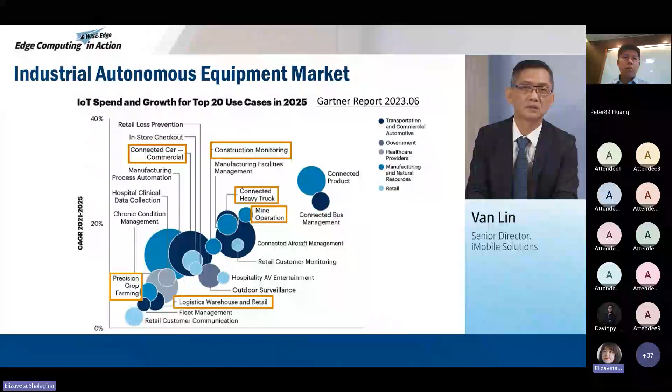Right now, what kind of vehicles should Advantech focus on? Definitely not consumer vehicles. We don't work with the kind of cars you drive daily, but we mainly work on enterprise, industrial, intelligent, autonomous machines and devices. This includes port, mining, construction, agriculture, warehouse - all of this stuff needs more intelligent machines to help with better productivity, efficiency, and safety.

So you mentioned you especially focus on heavy-duty machinery. Yep. And we have many harsh conditions that really need these machines, and among those, mining is one of the most demanding and harsh conditions in these sectors. So explain, in the mining condition, what are the key challenges you're facing, and do you have any solutions? Okay, so the first thing is Advantech has worked in the mining industry for more than 20 years, and based on all that real practice, even until now, we recognize one thing.

Sorry, the world still has a war going on, and right now natural resources are the most important thing for any country, whether emerging or a very mature region. Natural resources definitely are power, so many countries invest a very big amount in the mining industry. That includes intelligent mine site setup, and also includes intelligent mining machinery.

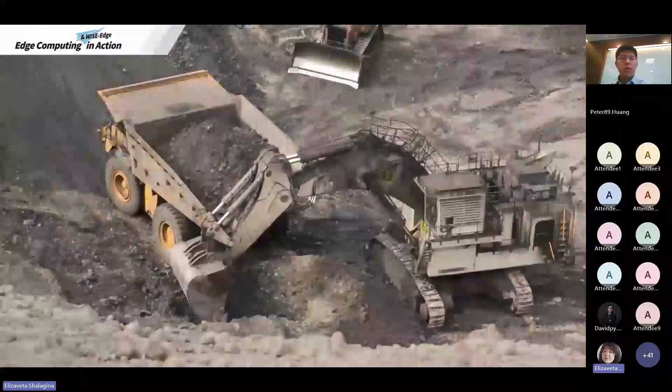That means in the deep mountains, if the equipment has any issues, any problems, or any safety risk, then the mining site must be shut down.

Not only does the port have strike issues, even the mining site has the same topic. If we want the mining side to have productivity and efficiency, we try not to rely so much on experienced people. We need to use more technology to let the machine and the mining side work more efficiently. Advantech has decades of solid experience in this domain, so we can deliver intelligent mine-site solutions to build up the intelligent mine-site environment.

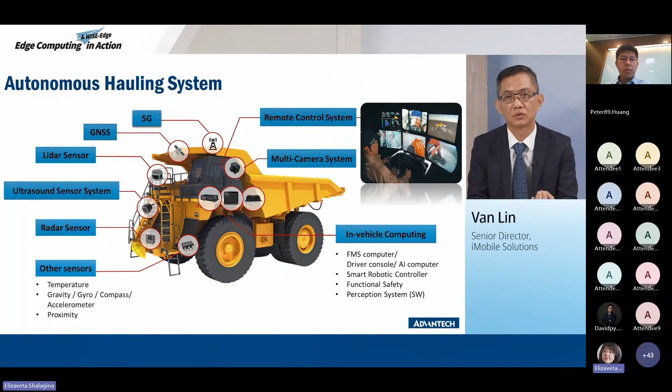No matter about connectivity based on Wi-Fi, private 5G, or V2X technology for communication - we also have an intelligent mining machine device equipped with our solid, trusted in-vehicle computer solutions, combined with our ecosystem, like LiDAR, radar, and all the AMR software partner platforms. We can form all those autonomous solutions together. So no matter from the diagnostic connectivities about the vehicle situation, the health check, the pre-diagnostic, all those things, and even remote control.

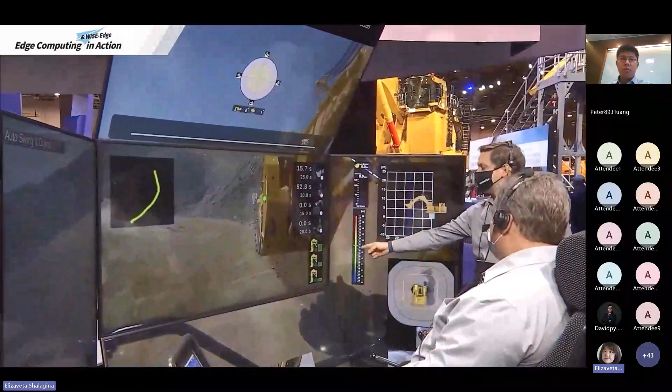That means people won't need to sit in the vehicle, but sit in fully air-conditioned areas. They can still remote control the machine, especially in a very difficult environment. And eventually, definitely, that will lead to the autonomous vehicle.

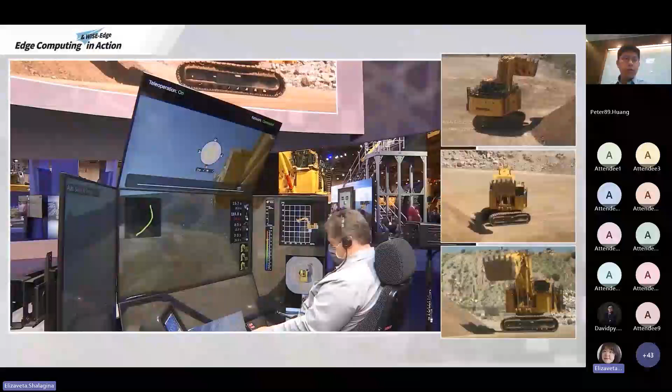When we talk about intelligent vehicles or autonomous vehicles, there are different phases to migrate through. The first one will just talk about position and locationing - just knowing where the vehicle is. Of course, that's very important. But later on, we still need to understand the vehicle situation and any existing or possible mistakes, issues, or machine breakdown topics. Then, based on that big data, we can have machine learning and do diagnostics.

That's about the predictions. And then we can picture that people aren't okay working in a very difficult environment, so we need some remote control technology there. And then the last step will be autonomous. Autonomous is a very big topic, but definitely that's our goal.

But before autonomous, from level 2 to level 4, people will still sit in those industrial intelligent machines, and all those communication and AI activities will help the drivers, help the operator drive this machine with high productivity, efficiency, and reduce risk. That will include driver behavior management, blind spot detection, and AI to understand whether this digging is really productive or needs more time.

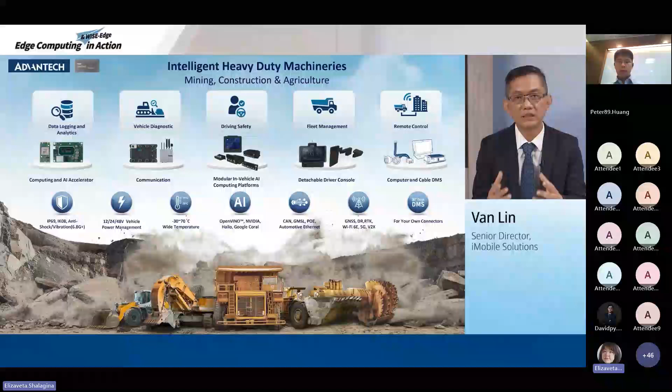And eventually, this machine needs to run in the field for decades. Because those kinds of machines cost most vendors at least 1 to 3 million, or even much more, we all expect those machines can run in the field 24/7. We expect no strike issues, no safety issues - we expect everything can move day and night.

So based on all this need, all our communication, computing, and AI technology can help the machine and the mining site work in a very efficient way. And the best practice is that Advantech participated in this market for decades.

We not only know about the technology, we know what the mining sites need. They expect trusted, reliable, and stable longevity support, and also many years of RMA service, and very trusted remote control technology. So that's what Advantech overall can offer.

We also will define the future's mining technology roadmap. So we work with AI vendors like NVIDIA, Hailo, Intel, AMD, and also communication vendors like V2X. Based on all this technology, we try to lead this industry toward a new future, for higher productivity, safety, and lower risk.

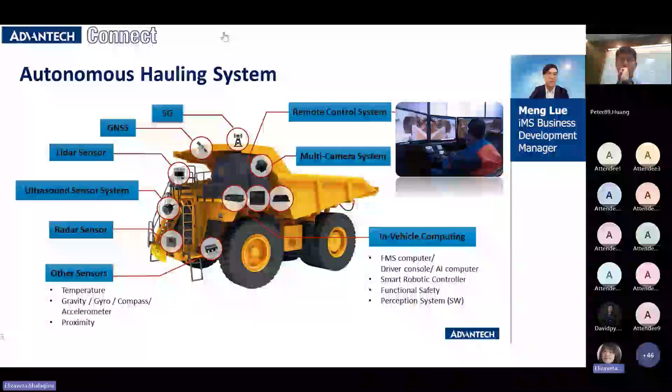So let's next talk about a few of the different systems. We break down the systems so you know that even if your customer or your mining site doesn't need autonomous systems, those breakdown systems can actually still help their mining operation.

First, I want to talk about the drivability map system for the vehicle. Knowing that for underground tunnel mining or open pit mining, the geographic structure is changing all the time, and on the mining site there's no definite route telling the driver where it can go. It's not clear, so they need a navigation system telling them where's the green area, where's the red area.

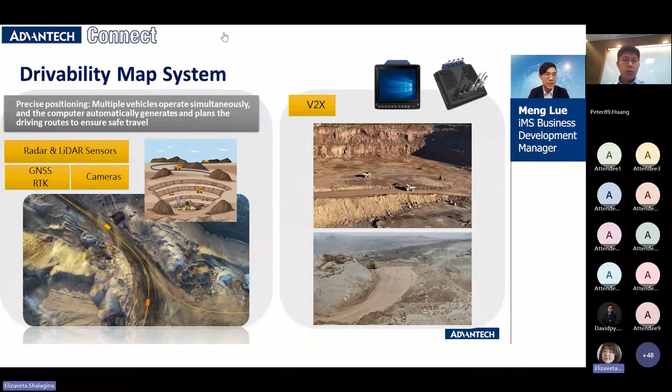As you know, a truck doesn't always provide necessary computer cables, just like what you see on a Lenovo computer or your home computer. It always uses IP rating waterproof connectors, which are very ruggedized. This is also part of the Advantech provider service, which I'll talk about later.

Next is the loading assist control. Just like how driving your car divides the autonomous system into level 1, level 2, level 3, and level 4, similarly a truck provides different parts of assistant control to help the truck's operation. Each vehicle on the mining side does its own job - for example, a digger does digging, and a loading truck does the loading of material.

This kind of AI system can help loading better, giving height detection so it doesn't go over height or overweight. It can distribute the weight more evenly so the vehicle won't roll over due to uneven weight distribution by the operator. It can minimize equipment wear when you use the truck at the right weight and in the right way. The AI should provide more information to the driver, knowing the truck's whereabouts and how much weight is on the back.

What Advantech provides is an edge computer with LiDAR to sense whether material is placed evenly at the back of the truck, and how big the rocks are, because some rocks are too big for certain trucks to carry. This LiDAR can provide precision down to the rock size of 1 meter by 1 meter, and even larger rocks are not difficult for this computer to analyze.

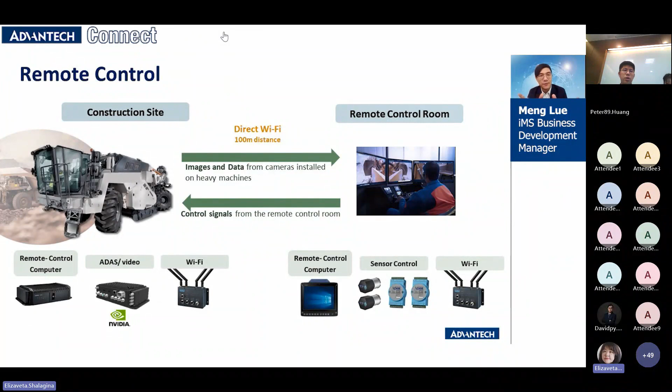Next, essentially, this is the last application I want to share: maintenance. Maintenance is very important because the operator is actually operating on the vehicle itself, and you probably cannot have another safety operator to monitor the safety procedure of those vehicles. So AI with camera, 24-hour monitoring of all the surroundings, including the equipment itself, is the perfect usage for maintenance.

So when any of the wheels or any part of the pickup forklift is not in the right condition for the operator to operate anymore, it will send a maintenance signal to the operator and to the back end. So the driver knows the vehicle has to be maintained right now because it's not suitable anymore. This is perfect for AI to do that monitoring 24 hours.

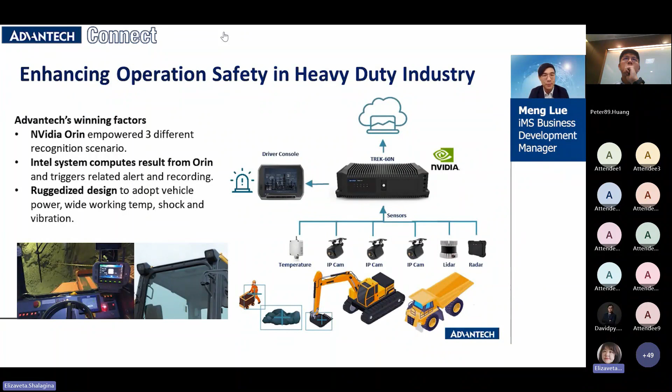A lot of mining customers ask our devices to survive from minus 40 degrees up to 120 degrees, because some underground mining is just so hot. But the Intel CPU can only last up to 99 degrees. So those are the conditions the customer gives us. They cannot improve the environment because it's just how it is.

So what Advantech service does is we suggest that we can make some cooling systems with a third party and contain our equipment within that cooling system, so our system can survive within that kind of harsh environment. So you get the idea that for Advantech, we are not just standing from the point of manufacturing—we're actually standing from the customer's point, combining our equipment plus some third-party solutions to make our device survive this kind of environment.

So besides the temperature, We also got a lot of requests for Linux, Yocto, and IED, and of course Windows is part of our reliable partnership. And certification—E-Mark, shock, vibration—all this is part of our category and all part of our service.

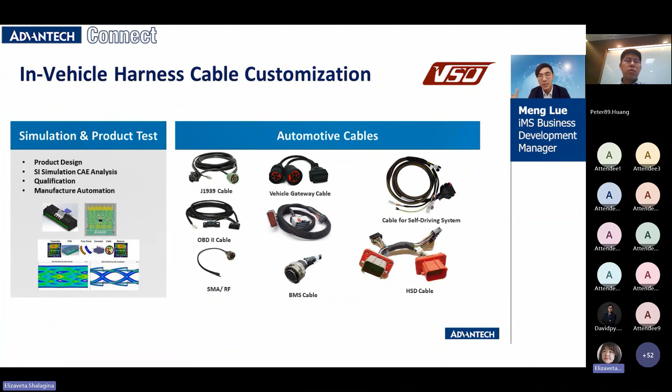And at the top of our range, we also provide the modular system, meaning that if you definitely need everything—car power, the Intel system plus NVIDIA, a PoE switch and RF router—all into one system, we can make that customized server, and this is actually our standard product.

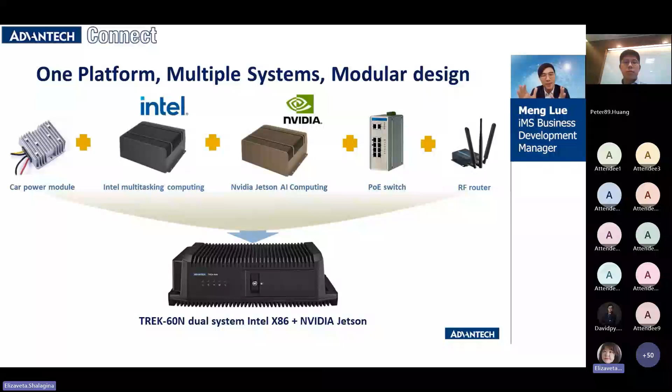But if you don't need this kind of customized design, you can just choose whatever you want. And if you don't need any of that, we also provide entry servers, or a single edge AI computer just to do one of the applications I mentioned before. So Advantech provides a wide range of products for you to choose from, and you can also customize whatever you need.

And if those standard products and customized solutions still don't fit your choice, we have a lot of VIP customers like Komatsu and Rio Tinto who definitely need something fully customized. Then we also provide consultative detail service to specially customize the product, specially fit for their solution. This is probably something I want to introduce to you—overall, our iMS product team provides the product range that can fit into this kind of AI automation or autonomous mining solution. Thank you for listening.

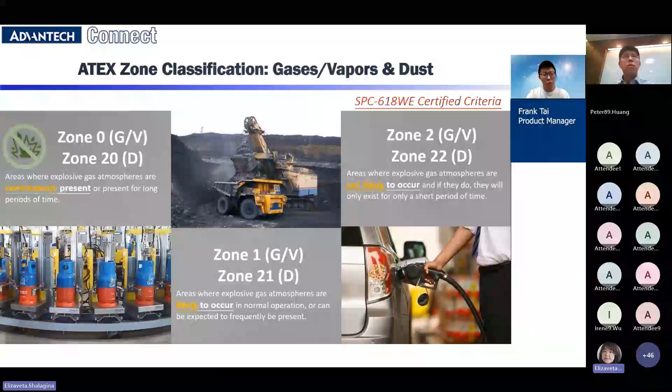This page describes the specification of the SPC-618WE. Compared to our legacy model, the TPC 318WH, we have a significant upgrade in terms of CPU, RAM, and SSD. We chose a more modern CPU, the Raptor Lake U-based Core i7, as its main computing horsepower. In terms of RAM, we offer much newer DDR5 memory. And for SSD, besides traditional TLC SSD, we also offer a much more robust and endurable STLC SSD, which will be explained on the next page.

Our machine is also certified to operate under temperatures between -20 and 60 degrees, and it is IP66 protected. But bear in mind that our machine is only certified for panel mount condition, so please make sure the HMI is properly installed in a regulated IP54 enclosure.

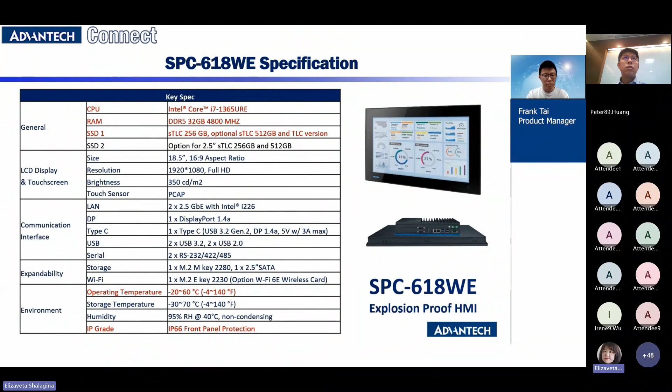What is the STLC? STLC is actually a specialized SSD offered by Advantech. Traditional TLC is often limited by the read and write cycle due to its design, so once it runs out of the read-write cycle, the SSD might fail. STLC is designed to counter this characteristic, so it offers way more longevity than traditional TLC.

And that is a perfect solution for explosion-proof products. You might know that all explosion-proof products can only be maintained outside of a certified location. In the case of Advantech, our sole certified location for production and maintenance is our factory and production line in Taiwan. That means if the SSD fails in the field, it has to be sent back to our factory in Taiwan for further maintenance, which increases costs and downtime. STLC solves this problem since it has much longer longevity compared to TLC SSD—even longer than the traditional MLC SSD, which is known for its longevity.

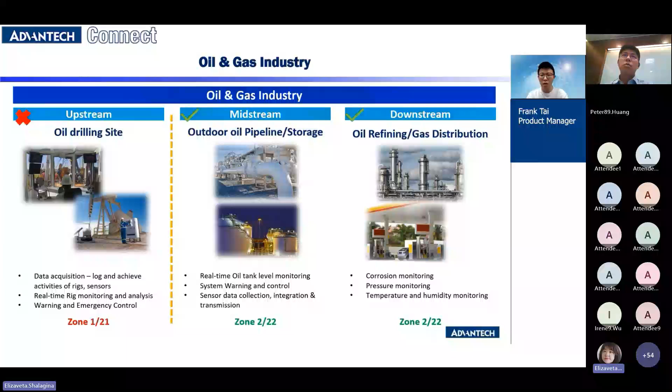Besides oil and gas, we're also trying to enter the pharmaceutical and food and beverage industries. In a lot of pharmaceutical factories, volatile and highly reactive solvents are often present. In the food and beverage industry, the flour and powder that could exist in that scenario are often pretty hazardous and require an explosion-proof machine to work properly. So we believe our SP600 series is also suitable for the pharmaceutical and food industry.

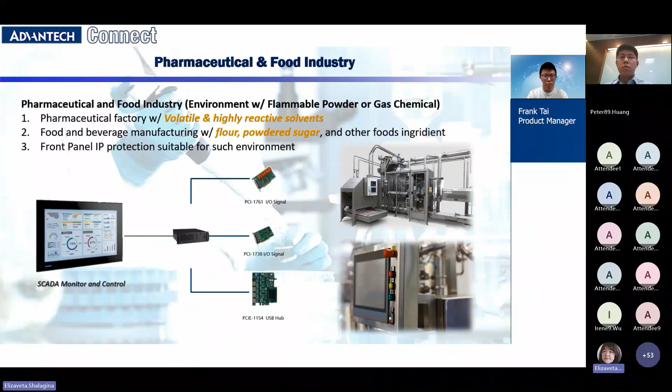Last but not least, we are also trying to enter the toxic and flammable chemical industry. For example, with certain Oceania customers, our 618WE is often used in the hydrogen energy industry. As you may know, hydrogen is a really flammable gas and can become really dangerous if the equipment isn't explosion-proof.

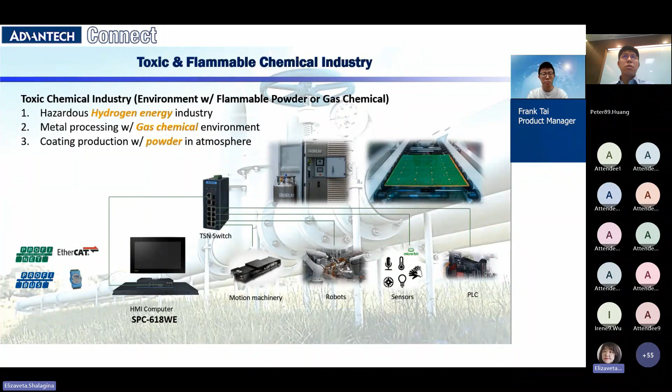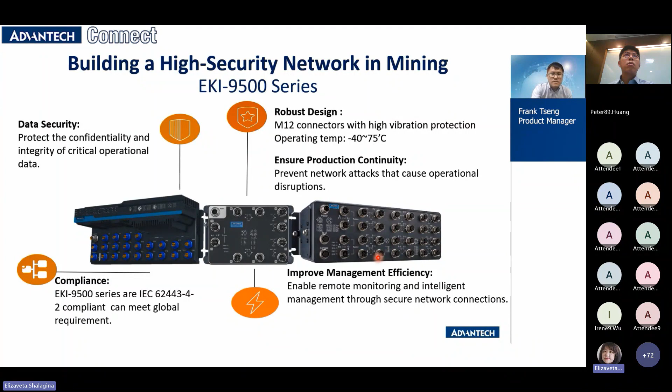Here is an example of our mining application story. At Advantech, we not only have the network switch, we have IPCs as well, so we can provide a total solution including our IPC, switch, and even camera.

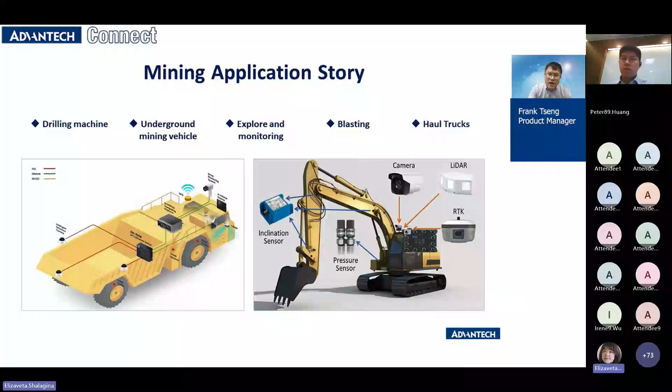Customers can implement this in mining vehicles and connect to many sensors, like pressure sensors or even radar, etc. So the user or operator can use our Advantech total solution for mining, like one-stop shopping. Not only the total solution, but we can provide very high cybersecurity protection in this kind of environment.

Our company implemented a cybersecurity committee, set up last year, with the purpose to increase cybersecurity communication across products and across regions. We have many different methods, even this committee, to help our products or our customers if they want to implement cybersecurity in their project or industry. We have a dedicated committee that can help our customers build up cybersecurity.

You can see that we have already certified with IEC 62443-4-2. So that's our cybersecurity plan.

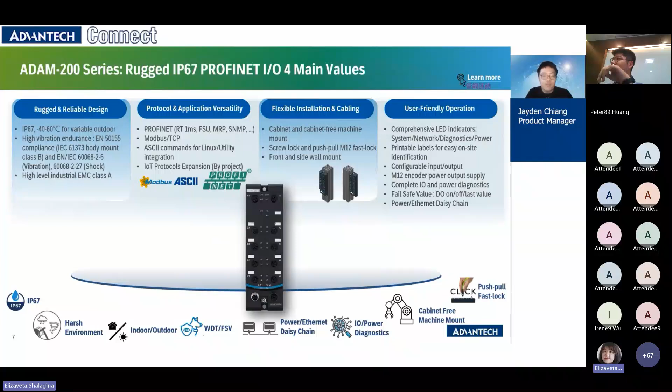The ADAM-200PN supports advanced Profinet functions like real-time 1 millisecond cycle, lower than 500 millisecond fast startup, MRP redundancy, and I&M data for asset management. It's also compatible with Siemens and diverse PLCs and software. And it can also connect via Modbus TCP or optional MQTT for cloud projects.

For adding value features, besides supporting both power and Ethernet daisy chain, diverse and configurable I/O, there are also full LED status and diagnosis monitoring, printable labeling, encoder power supply, RTC communication, watchdog timer, keep DO last value data, protection functions, and complete per channel or M12 port diagnostics functions. It is not only robust hardware - as you can see in the structure, it can also be smart and easy to integrate into PLC and SCADA systems.

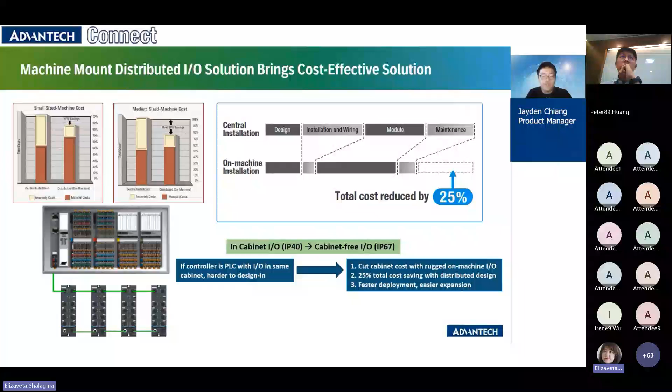Here you can see the difference between centralized cabinet I/O and decentralized machine mount I/O. Cabinet-free solutions eliminate long wiring, reduce noise, and minimize wiring errors. This opens up opportunities not only in mining, but also oil and gas, harbor, railway, wind turbine, tower, food processing, logistics, and airport baggage handling. The ability to mount directly on machines brings flexibility and scalability to customers.

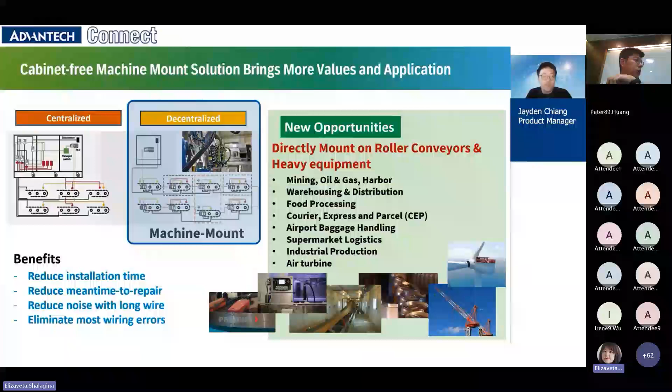The Advantech 200PN is truly designed for harsh environments: IP67 waterproof and dustproof, metal housing against oil, dirt, and humidity. It endures wide temperature from extremely low to extremely high, shock vibration resistance, railway compliance, and EMC protection with ESD, EFT, and surge. It also has M12 push-pull connectors for fast and secure installation. These features ensure reliability in mining pits, offshore oil rigs, harbor cranes, railways, and renewable energy plants.

The Advantech 200PN series includes multiple models to cover different I/O needs, such as digital I/O and analog I/O, and also RTD and thermocouples. All share the same rugged IP67 housing, M12 connectors, and wide operating temperature. Customers can choose the right module depending on digital, analog, or temperature sensing requirements.